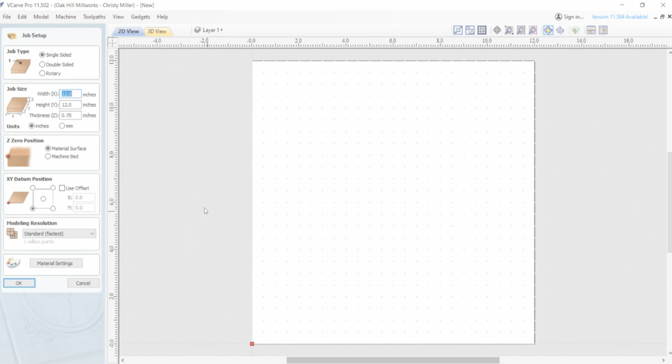All right, so let's jump right into it. I'm starting off with a basic 12 by 12 worksheet. The legs for this planter are 10 inches tall, and the planter tray itself is a 10-inch circle. So I'm just going to find a piece of material in my shop that is about 12 by 12 to work off of. I'm going to use 0.75 for the thickness in this illustration, but I encourage you to use a digital caliper to check the actual thickness of the material you choose, so this can be precise. Keep in mind you'll need to customize this thickness to your own material.

Moving right along, I'm going to assume you have a basic working knowledge of VCarve at this point. This is a project-based design help video, so we're not going to go over the ins and outs of everything, but I do hope you can pick up some helpful tips here.

I'm going to keep these settings the way I normally have them. We're going to zero the Z off the material surface. I personally like to use the bottom left-hand corner for my XY position. A lot of people like to use the center, but to me that requires more work because you then have to find the center. It's easier to just look at a corner and know that's your XY. So sticking with that, I'm going to hit OK.

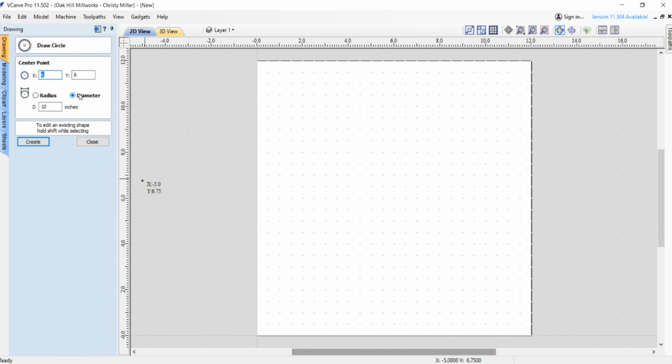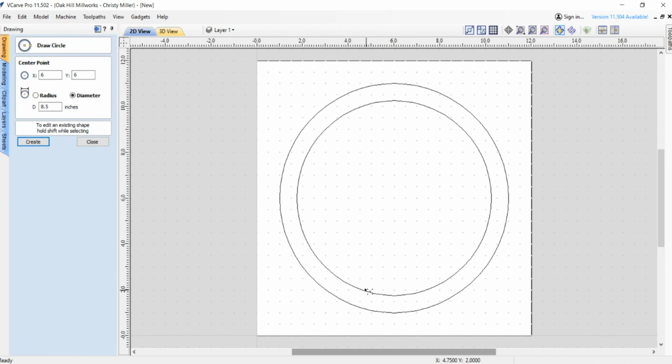But then we're going to do another one because we don't want this to just be a flat piece of wood. I think it'd be cool to carve it out and add some depth to it. So I'm going to put an 8.5 inch circle in the center, and we'll basically program it so this is a bowl bit carve in the center, and then we're left with a nice little ridge around the edge.

All right, so we have our circles, and now we are going to do the text portion. If you are interested in doing a VCarve as part of this project, it turns it into a 3-bit project, which frankly is a little bit annoying to change out that many bits for one project. So if you don't feel like having an engraving here, you can skip this part. But if you want to practice your VCarves and you're programming for that, follow along.

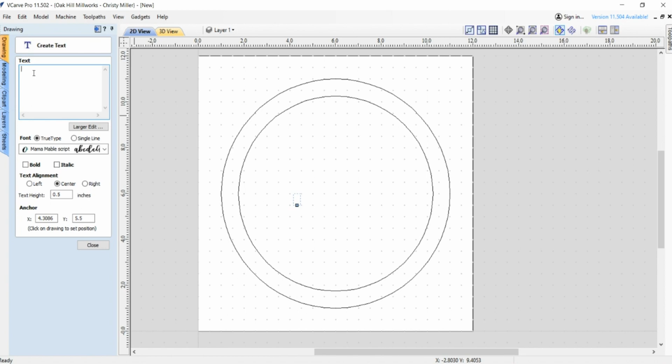The quote I'm going to do says, "Bloom where you are planted." And I want to do 2 different fonts just for it to be a little more aesthetically pleasing. So first I'm just going to do "Bloom," and I already selected this Mama Mable script that I had. I'm going to make that a little bit bigger and try to get it centered.

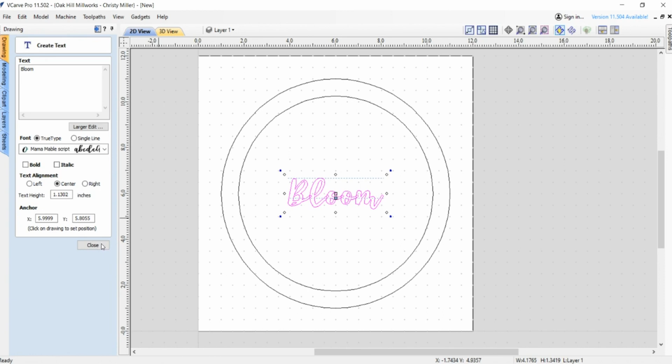If you're not sure how to get a quick center, you can select the item you want to center and hit function F9, and it'll automatically snap it right to the center of the page, so you don't have to navigate through this. Otherwise you could use align selected objects and use that tool. Just another little keyboard shortcut I enjoy using, that function F9, to center certain things.

All right, so that's the "Bloom." Then I'm going to do the "where you are planted." I'm going to choose a different font, and I think I just want to do this one in caps, and something that's easy to carve. This one.

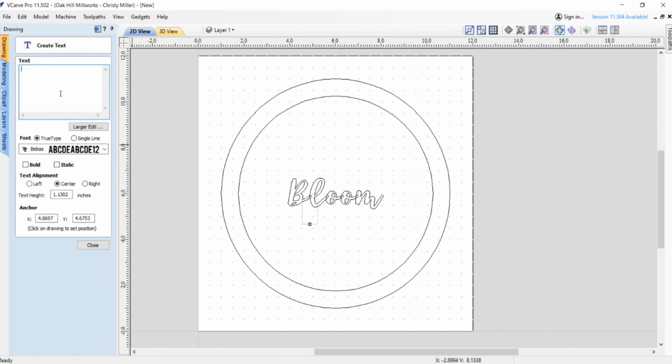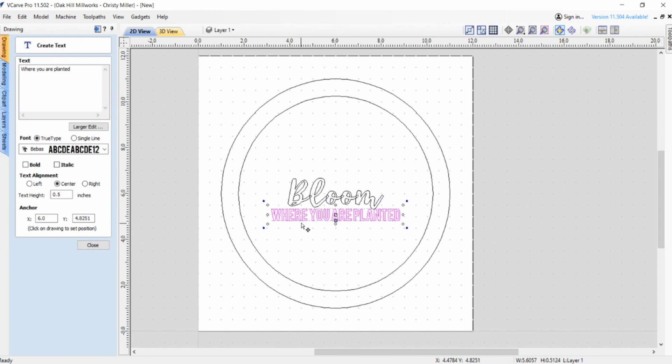And then we'll use that function F9 again, right here. It's going to overlap, and then you can just use your down arrow and get it where you want it to be. Looks like this cursive font is on a slight angle, that M dips down a little bit.

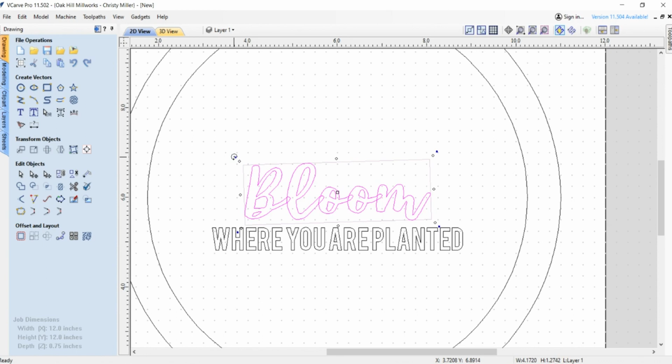We don't want those to run into each other, so I might bump that up a little bit, and I might even play with that by grabbing this corner and slightly rotating it. There we go, I like that. I'm actually going to center this as a group.

You can either select it all by dragging your mouse around both of it, or if you drag right to left and just touch the two things you want to connect, it'll select both of them. I love keyboard shortcuts, so I'm going to do a Control G to group those, and I think that works. Yep.

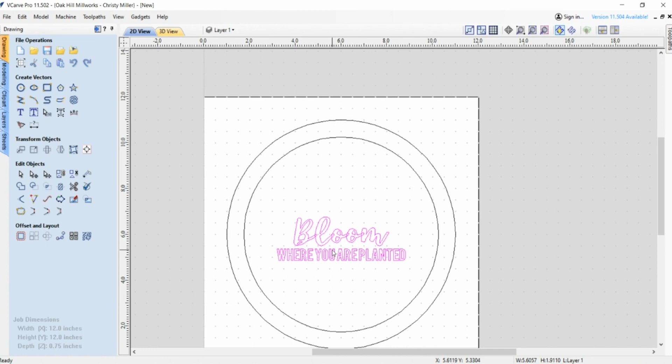So now that that's considered one group, I'm going to do Function F9 again. Boom, perfectly centered. Those little keyboard shortcuts, I just can't say enough about them, they speed up your workflow.

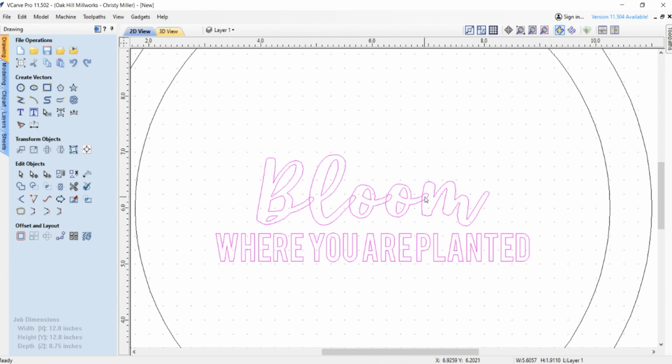Okay, before we go any further, we need to fix this issue. We have some overlapping lines, and that happens anytime you use a cursive font. So now I need to actually work on that, I'm going to ungroup them. You can use Control U to ungroup them, and see, it's by itself now when I select it. I think there are multiple ways to do this, but here's one way to get rid of these overlapping lines.

Since this is still considered text, first you need to make this a curve. This button here under Create Vectors kind of looks like a T, Convert to Curves. Go ahead and click that. You can tell it has turned into a dotted line, and then you can select each letter individually now.

That's going to allow us to grab this tool under Edit Objects, the Interactive Trim tool, you can just call those the scissors. As soon as you see your scissors, see they're closed here, and now you see them open, that means they're able to snip that line you're hovering over. That's all you have to do.

It's really fun, and sometimes you get a little scissor happy and you just hit Control Z because you cut the wrong line. Helps if you zoom in, and I love using an external mouse to help me design. I have a little mouse with a scrolly wheel thingy, technical term, and that helps you zoom in and zoom out really quickly.

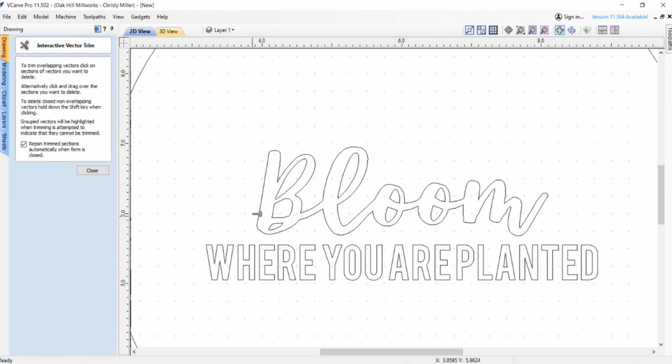So now just double checking, we have all of our lines nice and smooth, no overlaps. Now what you need to do is grab your transform mode, get your regular mouse back, and select all this and group it to make sure you're not going to have any parts floating around.

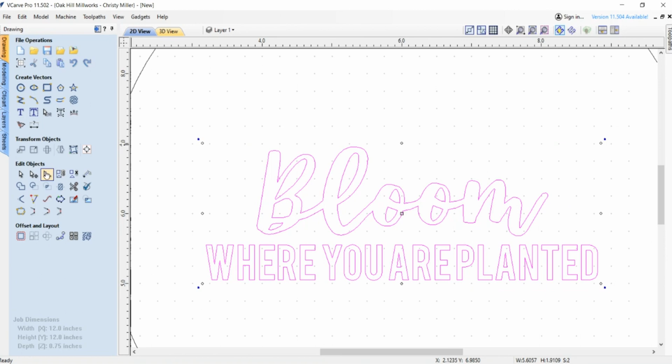And then I'm going to group this all again because that's all going to get programmed the same way as far as the toolpath goes. So there you have it, this is the part that's actually going to allow you to set a plant down on it in a pot.

So let's go ahead and get started on the legs. We're going to finish all of our design work first, and then we'll do all of our programming.

Before we go any further onto the next phase of design, go ahead and save your project right now to make sure you don't lose the work that you've already done.

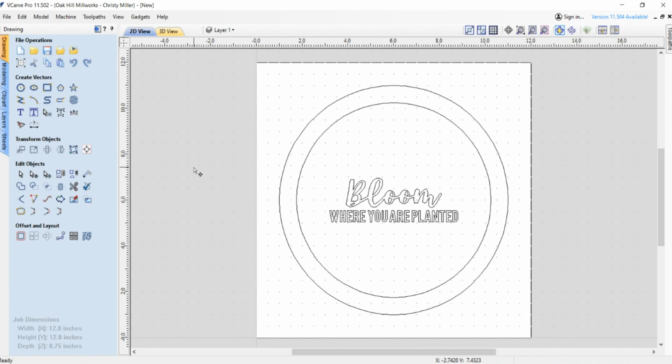And we're going to go ahead and add another sheet so that we can keep working in the same file and get started on the legs of the planter stand. So go over here to your Sheets tab, and we'll name Sheet 1 as planter, I guess. And then we'll add another one, and we will call that legs.

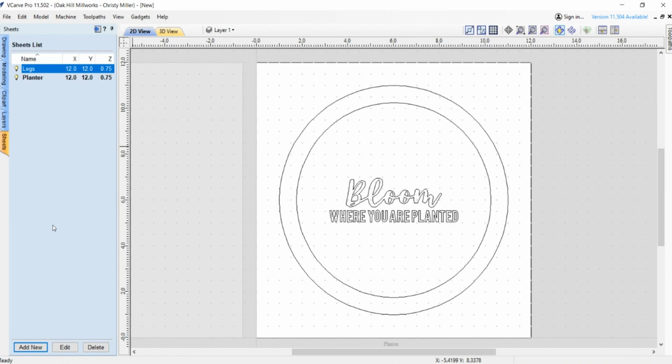And it appears to be over there. You just kind of see this one in the distance, and you just double click on it when you want to go back to it, or double click on the one you want to work on now. So go back to your drawing tab at the top, and now we're going to work on the legs.

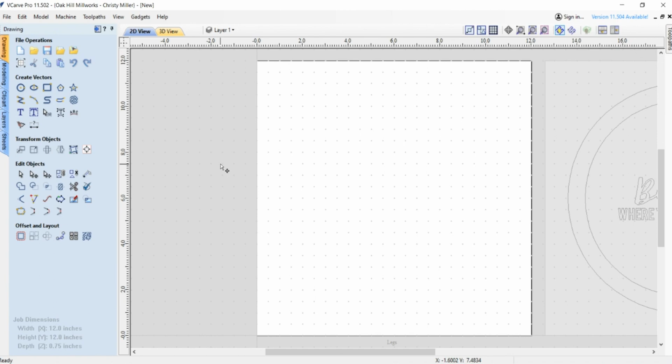So I showed you before this video started what the end product looks like. We have some cool mid-century modern type legs, and you can alter this design however you'd like to. This is just a guide.

But I basically started with a rectangle, and I made my rectangle 2 inches wide. I don't know why that says 0.75, but I did mine 2 inches wide and 10 inches tall. Right here in this option, it gives you the chance to choose if you want to do a radius on your corners, instead of a sharp corner like this, it gives you the chance to make a rounded corner, and I just thought that would look cool if it were rounded off.

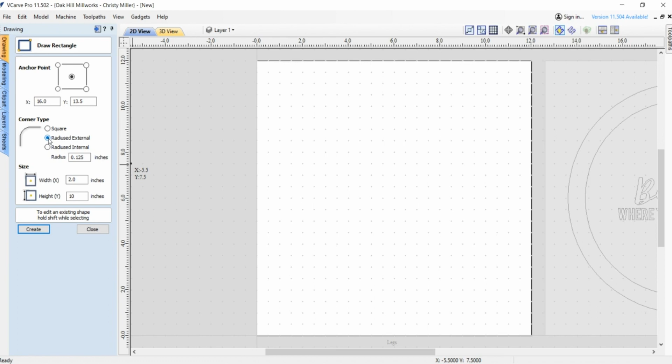So I did a radius external, because if you do internal, it's going to go like that. I thought this looked nicer. So I did 0.125 and just going to hit create. For whatever reason, this guy went all the way up there, so I'm going to just change my cursor over here and bring it down to where we're working.

So this is how I started off with the design of that leg. The nice thing is we need 4 of these, but you do not have to draw it 4 times. We'll be able to duplicate this or copy and paste it. So this is how the leg started.

And I basically thought, you know what, I'd like to put a cool angle on it. So what I did was, you can copy, Control C, and paste, Control V, and grab it. Then what I did was I just rotated it to the degree that I thought looked neat. I think I went for about a 15-degree angle.

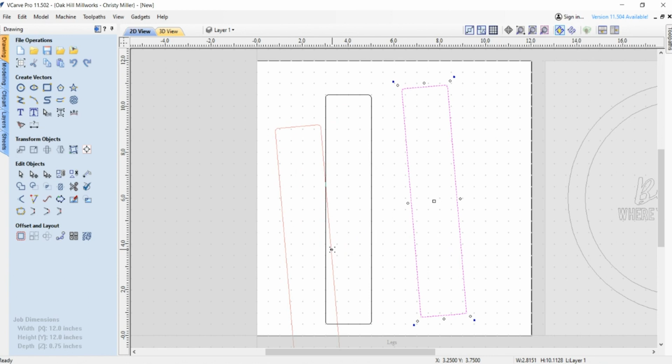This is, design is supposed to be fun, so kind of take it how you want it to look. And we're going to essentially overlap it, and we're going to use those scissors again when we kind of get the angle that we want.

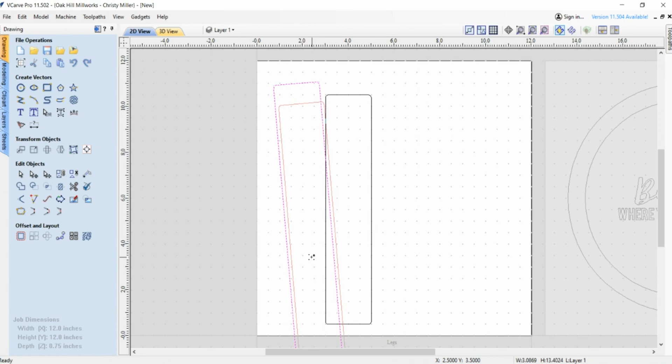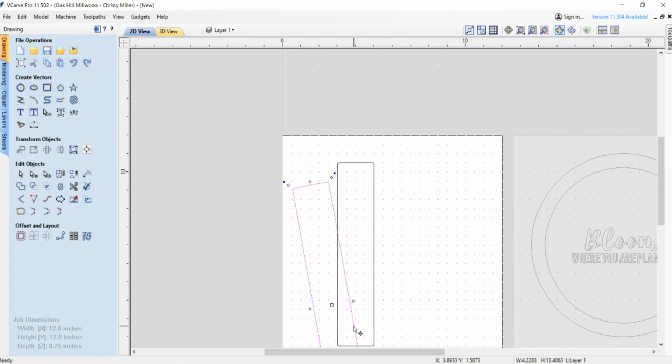If you want to make it a little longer so that it's more overlapped, you can. Might just go a little bit further if I can find it. Go a tiny bit more. And then I want it to be like halfway. I didn't really want a super chunky foot down here.

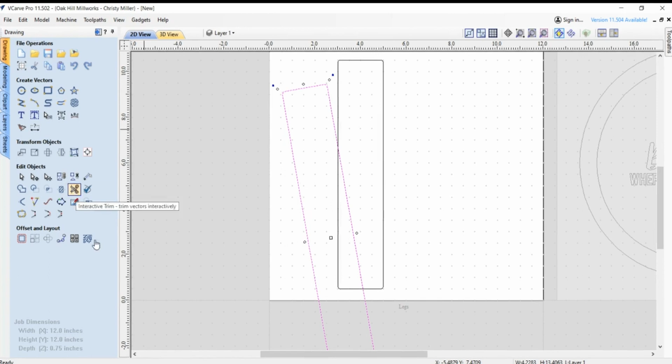So any part of the leg that you're seeing behind this pink is going to disappear. Right now we're basically using a rectangle to create a new profile edge, and I think I like about where that is. So now I'm going to head back over to those scissors here, and we're going to remove all this stuff just by clicking. Now we have this really cool mid-century modern style leg.

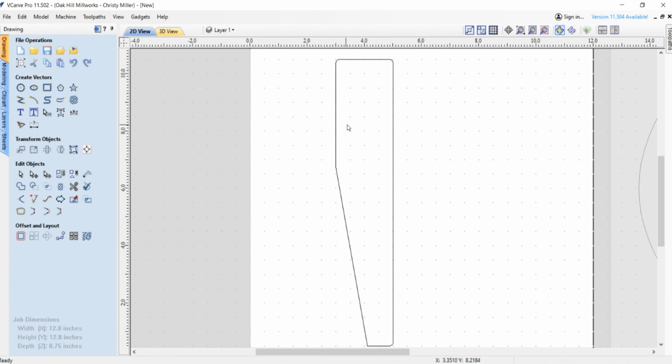Now the last thing we need on this leg is the half lap, kind of like an inset cutout for the tray part to sit in there. That way you don't have to use any tools to assemble this. It's just going to hopefully have a nice snug fit.

So what are we going to use to do this part, class? You guessed it, a rectangle. And now I remember why this was set at 0.75, because that's the thickness of the material, my hypothetical material thickness. I haven't actually chosen a piece of wood yet.

I'm recording this before I carve the actual planter. So once I figure out the actual thickness, I'm going to match it to make sure it's a nice snug fit. So here we go.

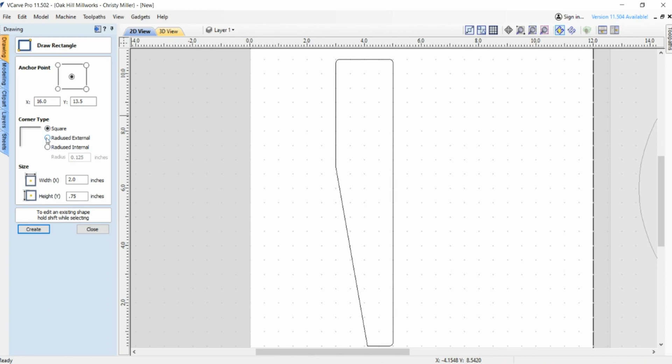And actually, we don't need a radius on this one, and I'll show you why in a second. But we're going to create that, see where it landed, switch back to our transform mode, aka just our regular cursor that allows us to grab and play with objects.

And here, you basically want to decide how far do you want your half lap to go in. Picture this, if this is kind of where your tray will be and your planter pot bottom will be on top of this, how much of this leg do you want sticking up?

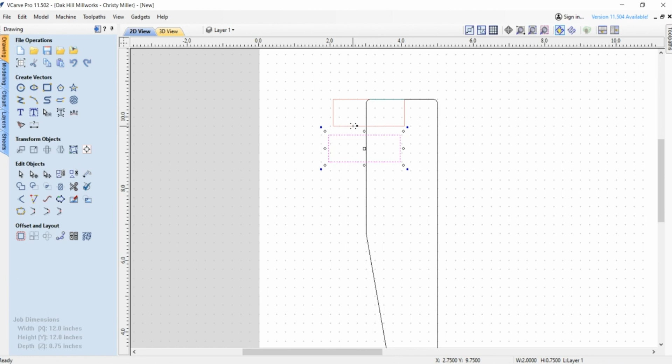This is the part where you get to customize it. You could have it be flush. If you wanted a really clean look, you could do that. I just kind of liked it sticking up a little bit for some reason.

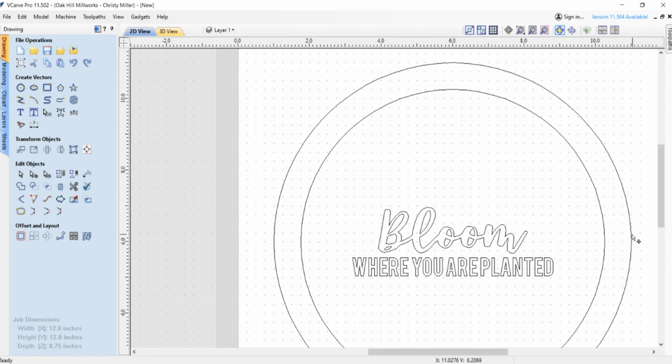I wouldn't really, over here, if we just switch screens here, we did this inner circle 8.5 and this outer at 10 inches, which means we had 1.5 inches for play all around, which means the thickness here is 0.75.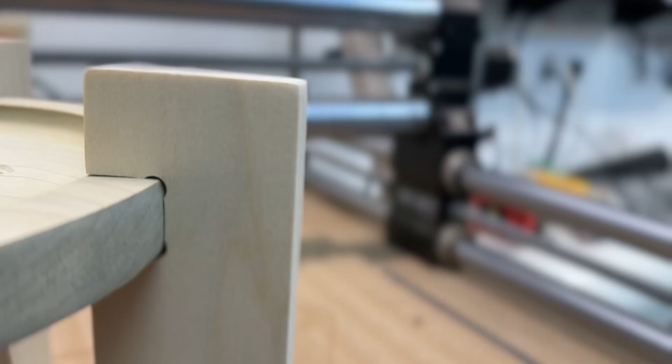So that keeps coming up as kind of our magic number. I wouldn't want this to be deeper than 0.75. Personally, I'd probably want it to match that thickness of that rim we put on.

If this line of the leg is on 3, that means we'd want this line to not be beyond 3.75. You can either use this X scale down here to tell you where your cursor is, or look at that line moving between the 3 and the 4. So this is 3.5, which means this is going to be 3.75. Really close, but I don't have my cursor exactly on it.

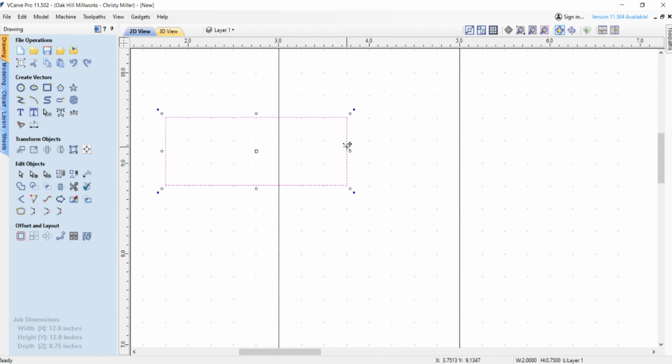So we're going to try to drag this and watch the numbers. 3.7513 - that's good enough for me. I'm going to call that good.

Now that we have that, we're going to go back to our scissor tool, our interactive trim tool, because it's just fun. Boop - you got to make that noise to make it a successful cut. Boop. Guys, that was pretty easy, right? And it kind of looks like a professional looking leg style. We did that using a series of rectangles and just snipping off the extra lines.

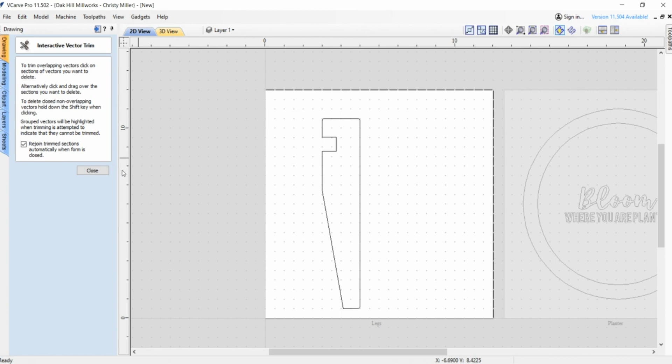Job well done. If you've made it this far, if you're watching on your phone and designing with me, job well done. Last step here, because we know that this tray is a circle.

So it's not going to fit real snug back in here. And to be honest, this isn't going to cut like this because we have round bits. How can a round bit make a perfectly square corner when it's traveling this way? It's not going to. So we have to add what are called fillets - that's what everyone else on the internet is saying. I want to say fillet. Maybe I'm just a big steak lover. I don't know, but we have to add some fillets.

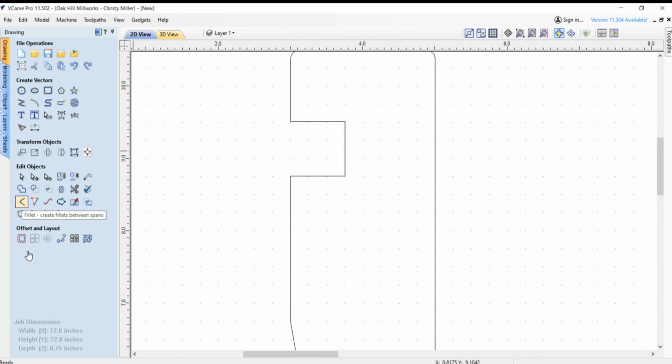So we're going to go down here to our fillet tool. I hope the people who made this software aren't cringing because I'm mispronouncing it right now. But here we go, this is the Create Fillet tool. We're going to do a dog bone version, and that will allow us to get a nice tight fit. It says you use your tool radius for your fillet size. So I'm using a 1/4 inch bit on this profile cut, and half of 0.25 is 0.125.

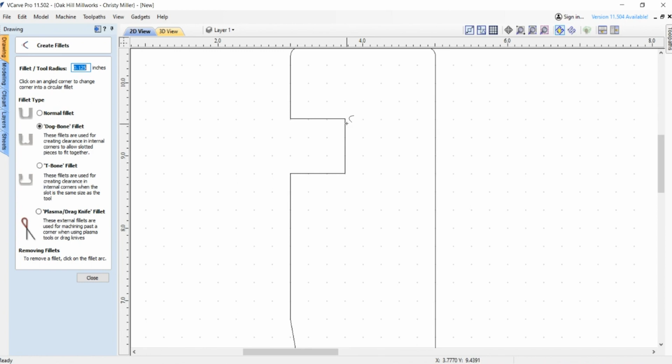That's all set up, and you don't hit apply or anything - there is no apply button. You'll just notice your cursor changes with this little curve, and you literally just click where you want it. Just clicking, and see how it kind of resembles a dog bone? That's why it's called a dog bone. So that will allow this circular tray to fit snug as a bug in a rug all the way in there and have a more secure fit.

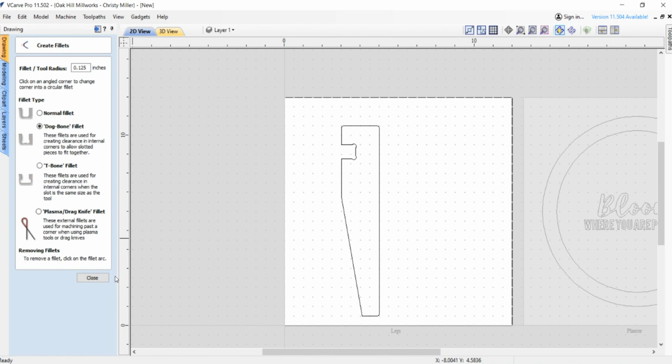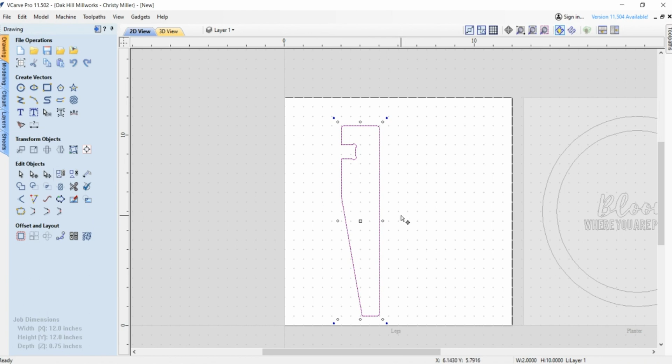Awesome job, this is the fun part. We select this and we see that we have all one line, which makes it easy. We can hit copy and paste 3 times because we need 3 more legs. You probably could get away with only 3 legs on this, but I opted for 4. So there's 1, and there's 2, and 3, and 4. Guys, we did it - we did 4 legs and a planter stand with an engraving. Celebrate a little bit, but we're not done yet, so hang on to your hats.

So let's do our VCarve... second. Almost had you there, guys. Thanks for keeping me accountable.

We're actually going to - so imagine this is our raw piece of wood. Just back up here with me for a second. We're going to select this inner ring because that's going to be our bowl bit, and we're going to carve that out first.

I'm using a bowl bit, a 3/4 inch bowl bit, and you can use whatever you have, but this is what I have, and it is the ICE coated Whiteside 1372 bowl and tray bit, 3/4 inch diameter, 1/4 inch radius on the shaft, or 1/4 inch shank, and that's where we're at with that bit.

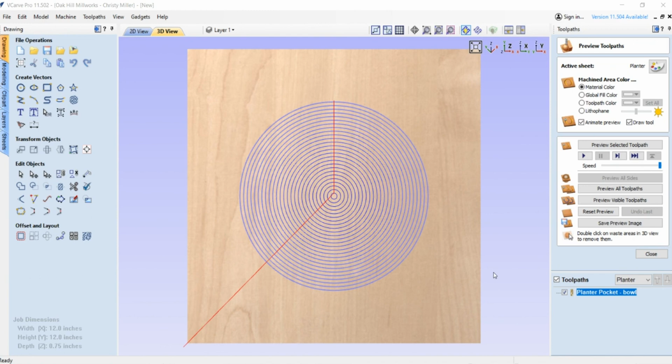And if you want to preview it right away, you can. And it shows you a little animation of what you did, and you can rotate it around to check it out in the 3D view, which is really cool. And then we're just going to close that.

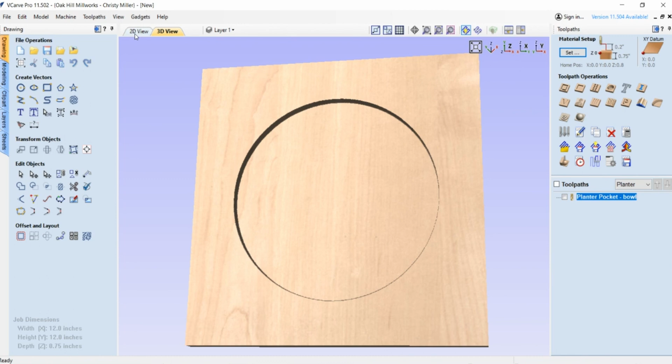We're good to go. If you're anything like me, you'd be hitting Control S like every 2 seconds to make sure you don't lose your work. So go ahead and save it and keep on going.

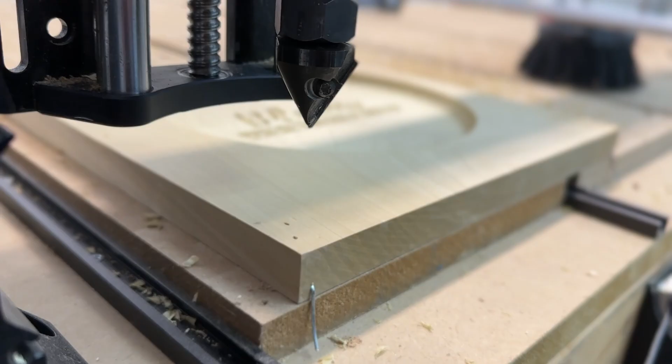So at this point in the carve, we have our bowl, and now it's time to switch to a V bit and do a VCarve. So we are going to start programming our VCarve engraving toolpath using this button right here. Go ahead and click on that.

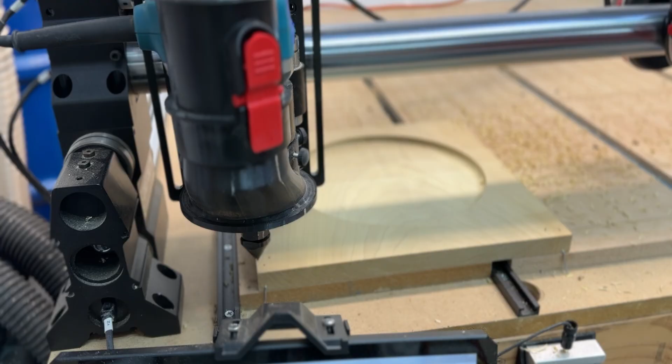So there's 2 ways you can do this right now. And I had this set up already in advance, but you can pretty much choose to do a start depth of 0.4. Just make sure that after you put your VCarve bit in, you are re-zeroing it from the top of the surface of the material again, not from the bottom of the bowl you just carved out.

If you make this 0 right after you put your V-bit in the router or in your spindle, you can lower it and just tap your new bottom of your carve that you just did with your bowl bit, and that'll be your new 0.

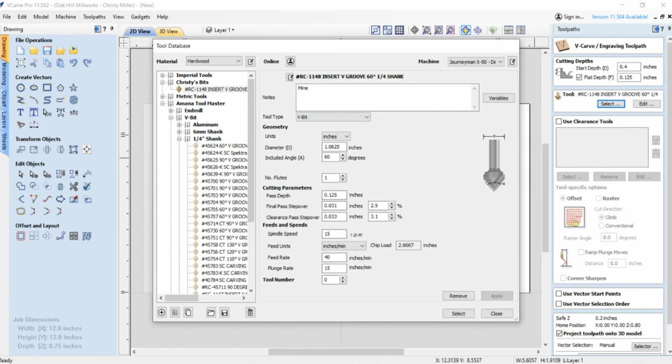And then I really don't want my carve to go deep at all, so I did a flat depth of 0.125. I'm using a 60-degree V-bit. And like I said, settings are already in here and ready to go.

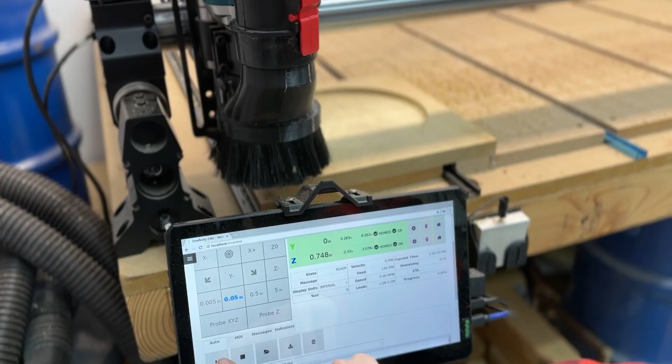So I'm just going to come down to the bottom of this tab and call this the planter VCarve. And I will know that it's the 60 because I will just go ahead and type 60 in there. And that way, when you're transferring these files over to your actual machine to execute the carve, it's just these little steps.

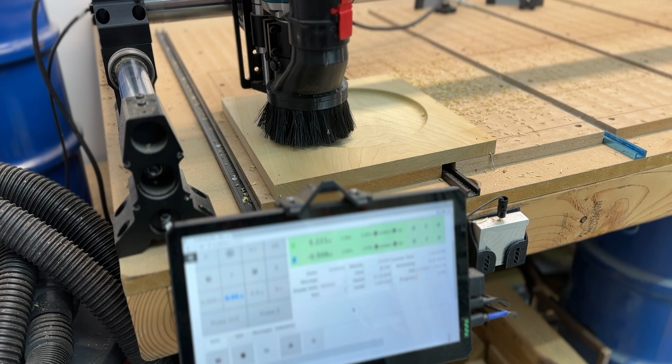I've learned that I need everything to be dummy proofed for me, because you get distracted. You might get a phone call. You might have music playing or have your ear protection on. Whatever the case, you might just get too much in the rhythm and forget.

Seeing this 60 will remind you to chuck up your 60-degree V-bit.

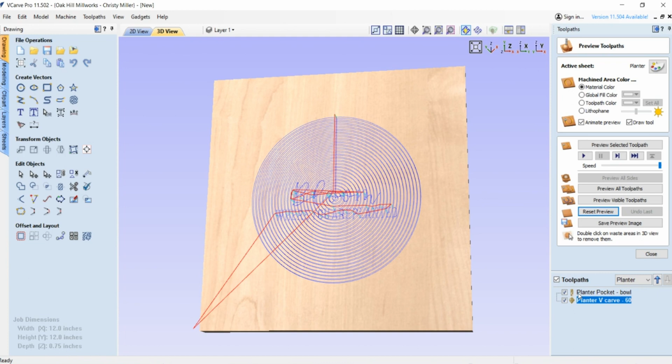So calculating on that, we're going to reset the preview so we can see everything we've done so far. I just get in the habit of clicking these boxes - I think you have to have them toggled to preview all toolpaths. So we'll have it carve out, and that went probably way too fast, but here's where it's at.

It's going to carve out 2 different passes with your bowl bit. That's how we programmed it. So this is still the first path.

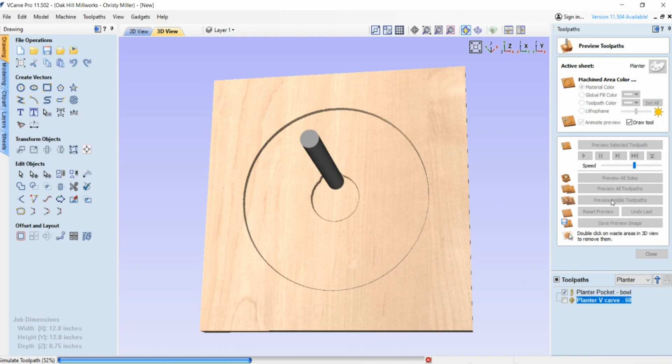Maybe I'll just have to tell you a joke or something. What do you call a cow that stands on 3 legs? Lean beef.

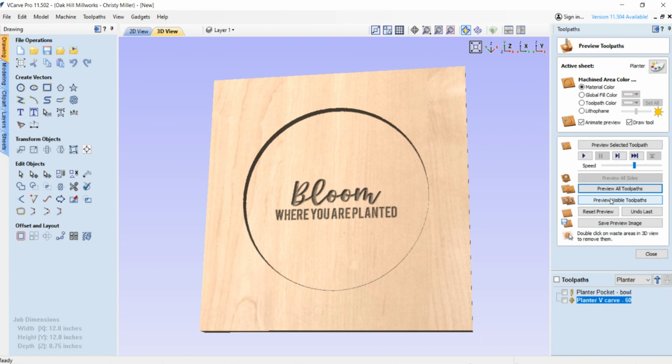Okay, that was bad. All right, here's the V-carve. Usually if it looks good on the simulation, it's going to work out nicely, but I would caution you to double check all your settings every time. To me, that looks really cool.

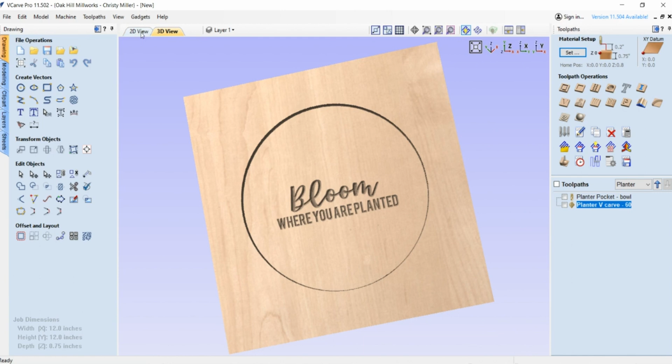Okay, Control Save, keep moving on, and we're going to go back to our 2D view with this tab. We've done the bowl bit carving, we've done the V-carve, and now it's time to program the profile, which will finally let us cut out our tray for our planter stand. So the profile toolpath is right here under toolpath operations.

And here we go. Start depth 0, top, because that's the top of the material still. And here's the little note, and I learned this trick from Mark Lindsay. Whatever your thickness is, it might not be 0.75 - this is my hypothetical thickness of my material, 0.75.

He instructs to add on 5/1000ths of an inch or something like that, just to make sure your bit truly goes through your material and you have a better chance of having a cleaner cut through. If you don't cut all the way through your material, speaking from experience, when you use a router to clean up the edges on these projects, it's going to be fine. Remember, it always looks worse before it looks better. Don't sweat it. But this is why I have 0.755 for my cut depth, trying to get it to go all the way through the material so I have a little bit less sanding to do.

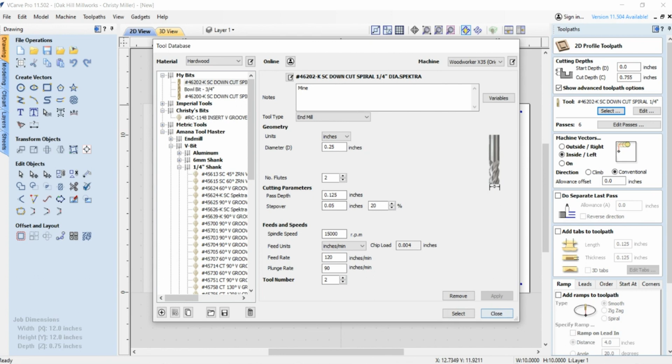So I am using the 1/4 inch 46202K spiral cut down cut Spektra bit, and these are the settings that were recommended for it. So there's that - 6 passes is way more conservative than it needs to be, I'll tell you. But if you're using plywood for this, more passes is better since plywood tends to chip out.

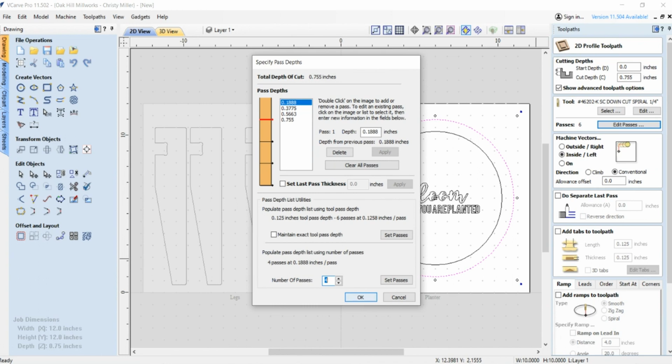If you're using a nice hardwood, people even push it much further than this. People will do a 1/2 inch depth at a time with a 1/4 inch bit. Depends on your CNC, depends on whether you're using a router or a spindle, and it depends on the bit. So I really encourage you to research what speeds, feeds, passes, and depths are best for your scenario, your machine, your bits. This is just what works for me.

So this is the profile cut, and I do not want it to be inside left - I want it to be outside right. If we were to do inside, it would be cutting inside this line and we would lose that 0.75 margin that we talked about. So yeah, definitely outside.

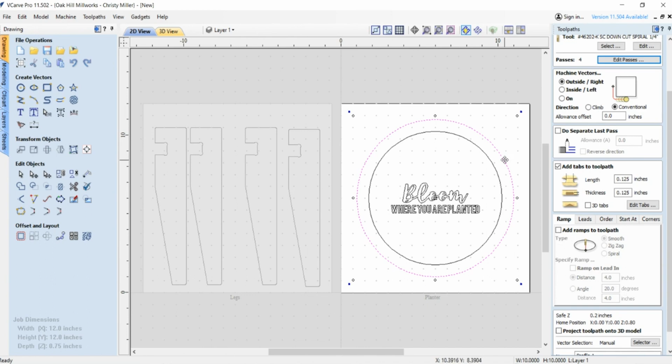And then a good practice would be to add tabs to your toolpath. 0.125 are good - they're tiny little tabs. They break off easily when you want them to, and they hold your cut out material to your workpiece, which should be fastened down with either clamps around the edges or double-sided tape underneath. However you want to do it. I like to shoot brad nails in through the corners and then pry them out when I'm done.

But yeah, adding tabs is a nice practice to just make sure your material, when it gets that final cut, doesn't turn into a flying disc and launch itself across your shop. So even 2 is fine, as long as the rest of your material is secured to your table, you'll be good to go. Okay, so name it - we're going to name it planter profile.

And I know that it's going to be with my 1/4 inch bit. So I'm going to put 0.25, and I'm going to hit calculate.

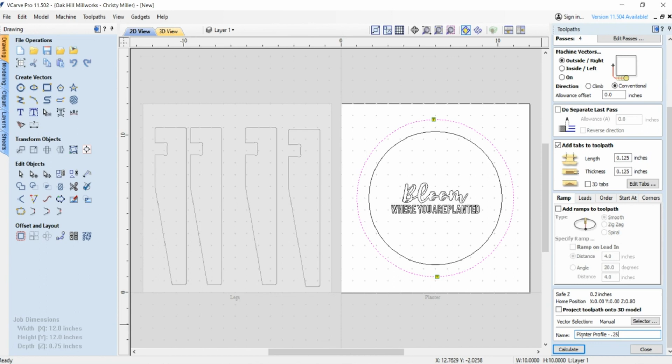And now this warning is coming up because I told it 0.755, because it's saying, whoa, if you do that, it's going to cut through your material and into your wasteboard. And I'm like, exactly. Welcome to the party, VCarve Pro. Just say okay, because you're smarter than the machine.

Don't forget that. So here we go. We're going to preview the one we just did since we've done that already. So it just carves it out all nice, and it shows you still have your tabs in there. And when you're taking this off your table, you can just use a chisel and a hammer and tap it. And that's that. It's looking really good.

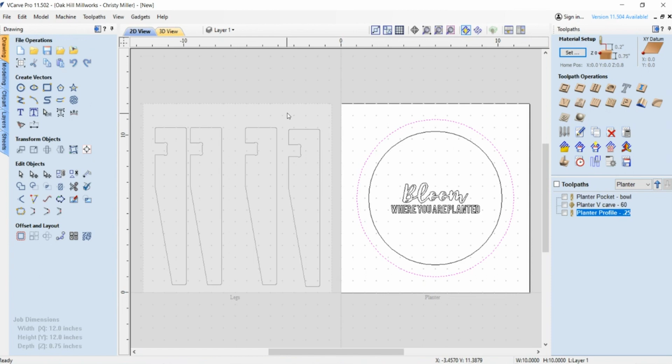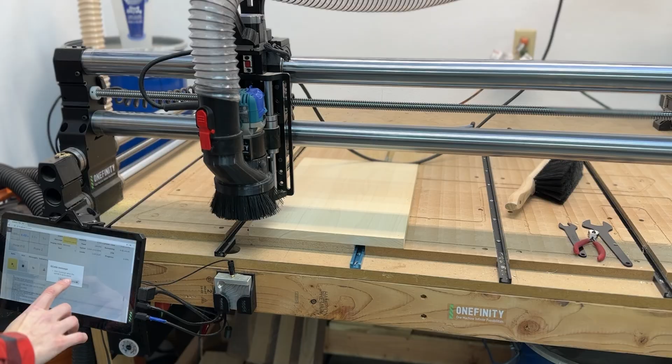All right, save. Let's move on to our legs 2D view, over here to your other sheet with your legs on it. Guess what, guys? This one's way easier, it's just a profile toolpath. And since you just finished cutting out your planter stand tray with your 1/4 inch bit, you're still good to go. You don't have to swap out bits at this point. You just need to put on your fresh piece of material onto your wasteboard and get ready to have some fun carving these legs out.

Arrange them however you want to have them on your material, however you need to, and select them all. Go back to your profile toolpath, and we're going to use the same exact settings we just programmed to cut out the tray. Once again, you can edit your passes if you'd like them to be more aggressive or more conservative. We are going to keep that outside profile cut so that it comes around the outside edge so we don't lose any of our nice design that we set forth.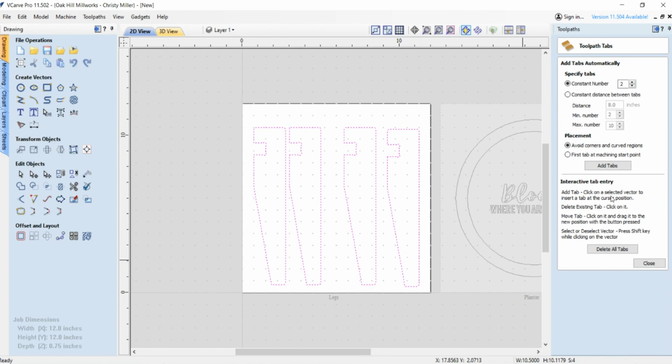We're going to add tabs again. It's just good practice. If you do have a really good hold down system in place and you trust yourself, then you don't have to do the tabs, but it's entirely up to you. And this is still only even suggesting 2 on each one, so that works. We're going to save this as planter legs.

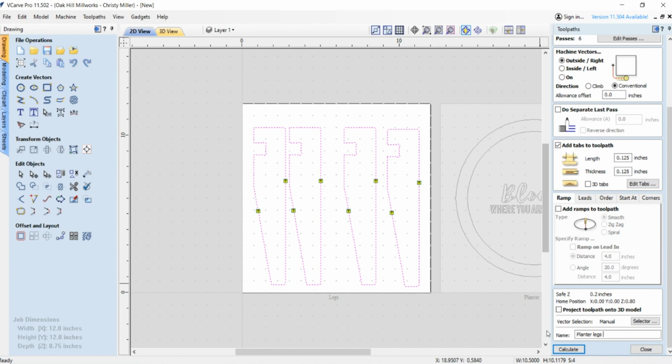And we know it's still the 1/4 inch bit, so 0.25, and we're going to hit calculate. And yes, we know. Thanks, Mom. Okay, and probably have these too close on the sheet here. So that's a great little double check system.

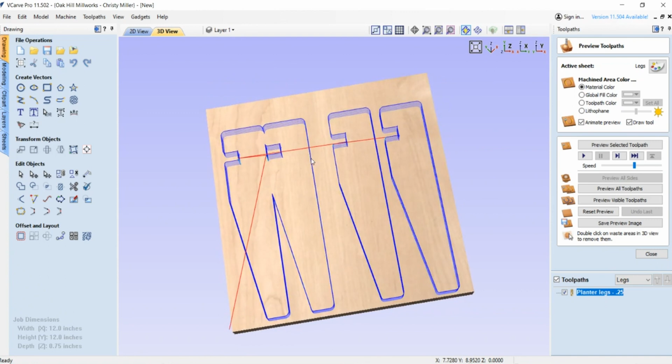Honestly, didn't even catch that myself. So I'm pretty sure I just got done saying you're smarter than the machine. Well, sometimes the machine is smarter than you, and that's awesome. This is a great double check system.

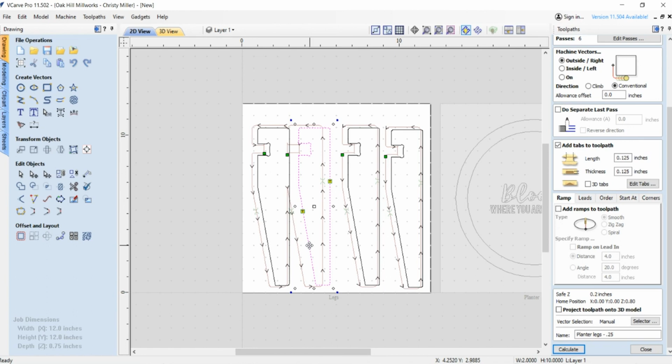So all we have to do is go back here, get our selection tool, and take this one and just move it a little bit further apart. You figure you have a 1/4 inch bit, it has to have enough room to go between these things, right? Or it's going to cut into your other one.

So it looks kind of crazy because it has the toolpaths that you just programmed incorrectly, might I add. Go, Christy, on there, but that's all right. You still have all your regular programming. You're going to recalculate it, hit OK again, reset the preview.

Oh, I might have only had that one selected. Goodness gracious, great balls of fire. Reselect all of them. Go back to your profile toolpath. Make sure you actually have them all selected.

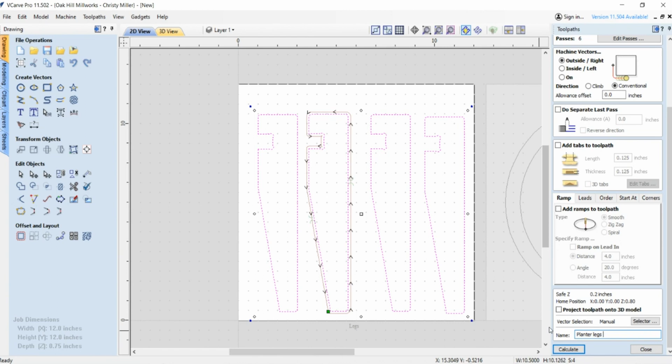Type it in again, planter legs, and you're using your 1/4 inch bit. Hit calculate, okay, reset the preview. Preview just this one. I think this is the new one. Or is that the new one? Oh, goodness, we'll see.

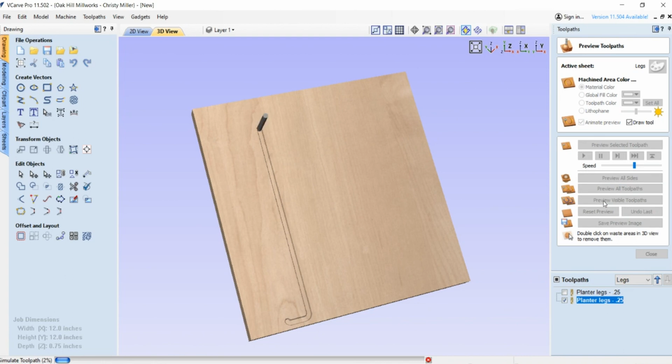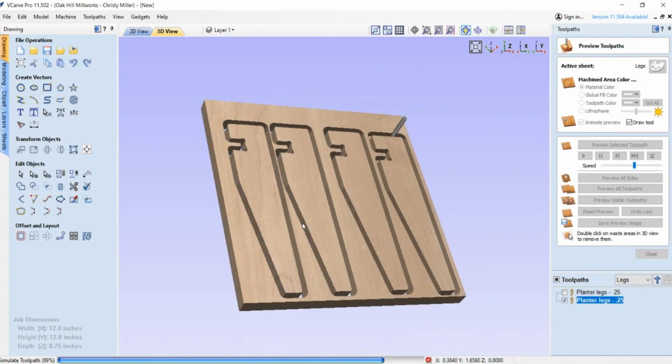And it's cool, you can even move it around while it is carving out your project. So we left just enough of a margin there, which works. You just make sure your tabs are on a thicker part, I would say. But how cool is that you can rotate this and see it carving from all the different angles, and you can see, oh my goodness, that's so cool.

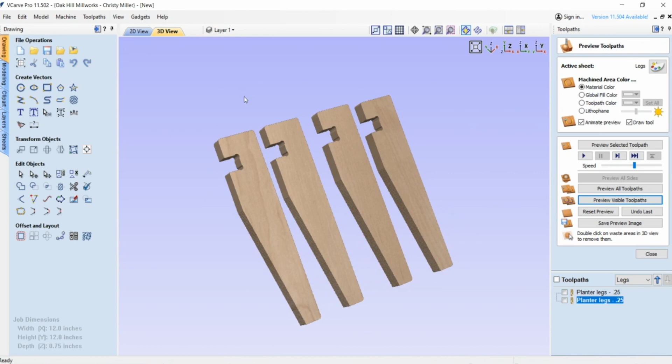So I think I forgot to put the tabs back on when I recalculated it. When you don't have tabs on it, you can double click on the cutoff material and it removes it. This is a really great tip, a bonus tip here, not intended to be shared in this video, but you can utilize this function to make models to show potential clients what their design would look like.

So, but I showed you how to do the tabs, so you can go back and do that in your own practice. So that is everything, guys. We're like right there, we're at the finish line. Close out this simulation thing here. Hit Control S just to save your project as a working file on your computer right now. And then what we need to do next is select.

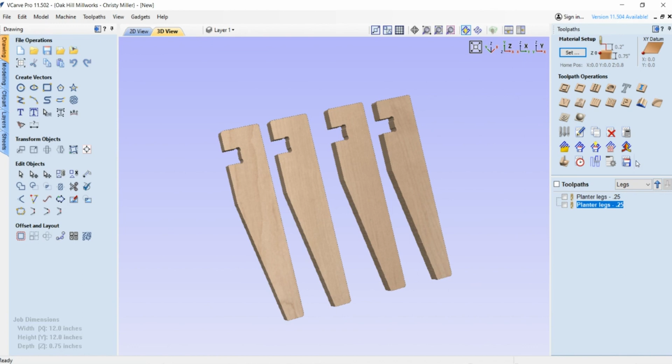What we need to do next is go to our Save Toolpath button, which is that bottom right-hand button. And we want to select Visible Toolpaths to Multiple Files.

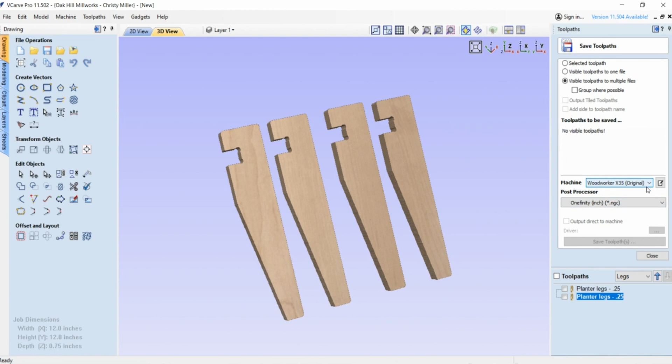We're not going to group anything, that's not going to work out in this case. But Visible Toolpaths to Multiple Files, and then however you want to save it. I tend to put in a USB because that's how I put it into my controller and run it on the CNC. I do not have that currently plugged in, so it's not showing up. But you guys know how to save stuff on a computer, I have faith in you. So you'll save it and you'll be good to go and ready to get started with this awesome project on your CNC. So let's go.